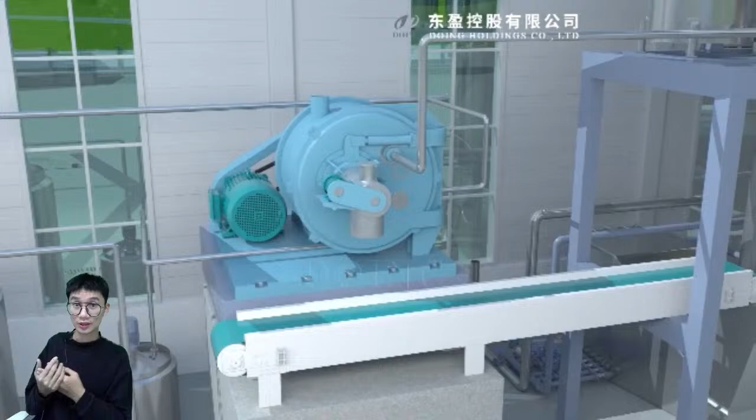Before I show you guys our processing technology, I'd like to spend some time to show you about our company, which is called Doing Holdings. We started to do the cassava starch business, gari business, cassava flour business, potato starch, and sweet potato starch business since 2011.

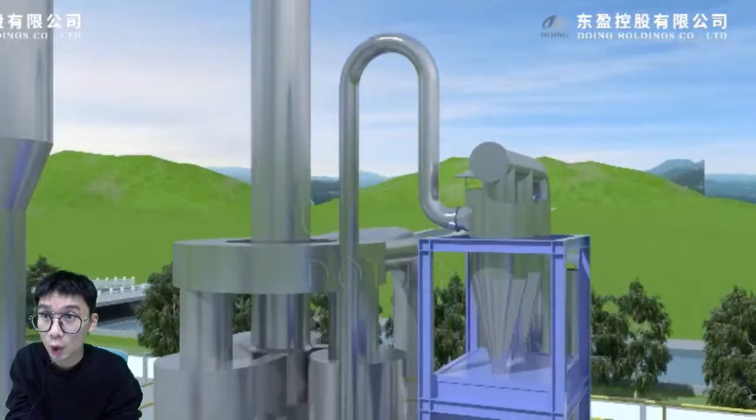For our starch processing line, the starch rate can achieve 94%, which you can easily compare our company's equipment with other companies or other countries' equipment. You will be totally amazed by the high efficiency and the price, because we have our own workshop, we have our own factories.

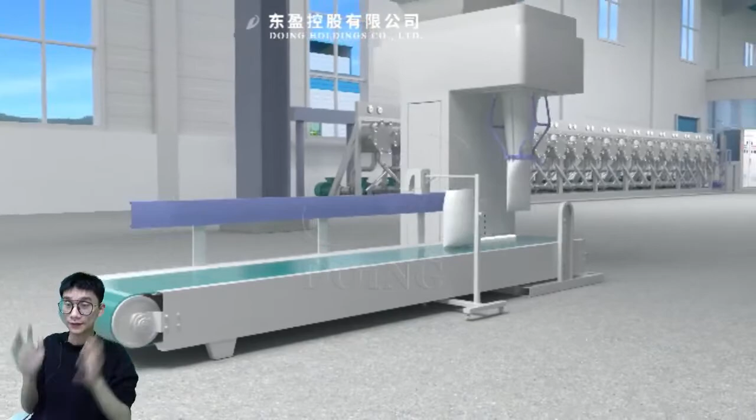Our company is called Doing Holdings, and for the factory, we have two factories in China, both based in Henan province, China. But since this year, we started to have our own factory and overseas office in Nigeria.

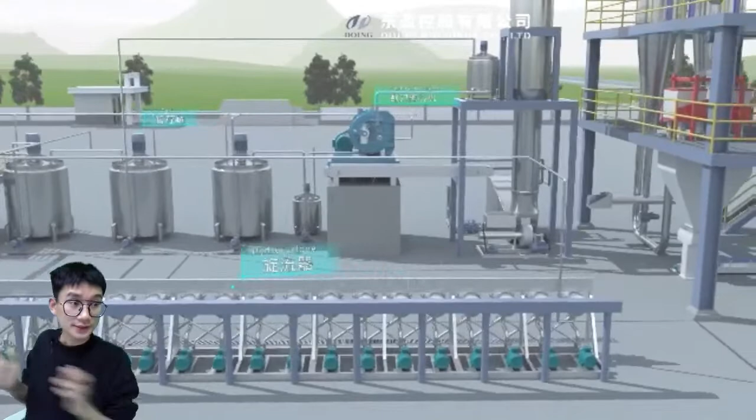All right, let's start from the beginning. I'll show you every single detail for the cassava starch processing line, and later I will also show you some real video that our previous clients sent us. So I'm sure you guys can definitely get more information and know more about the equipment.

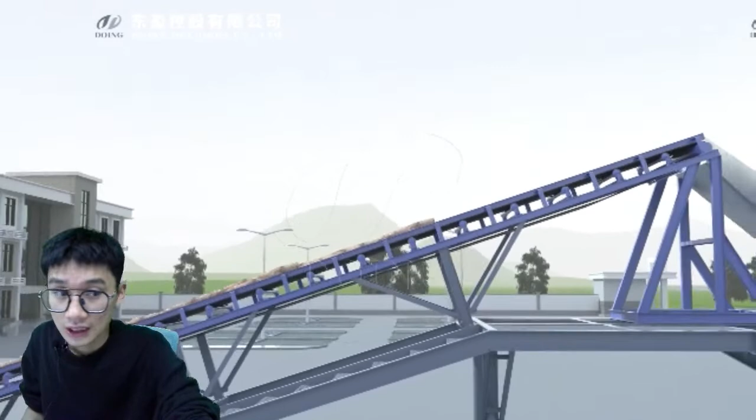And then this is our belt conveyor. The friction is large enough so that all of the raw material will not fall off the belt conveyor easily, and it will not break easily.

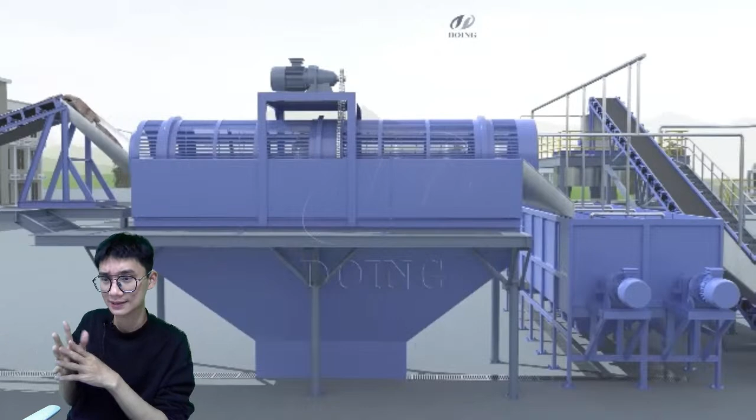The first device that we use here is actually the dry sieve. Let me just pause it here. For this dry sieve, this part is actually the impurities outlet. When this equipment is working, it will keep rotating, and inside the equipment there is actually a helix design, with some sticks attached to the helix design.

So when it is working, all of the raw materials will be pushed forward from the inlet part going to the outlet part. And during this process, those big impurities, like sticks, mud, and sand, will fall off the raw materials easily.

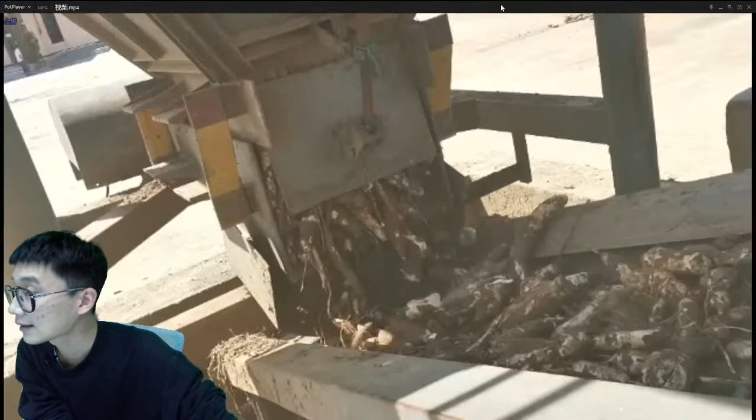Let me show you about the feeding hopper. This is our feeding hopper, can you guys see that? There are so many impurities mixing together.

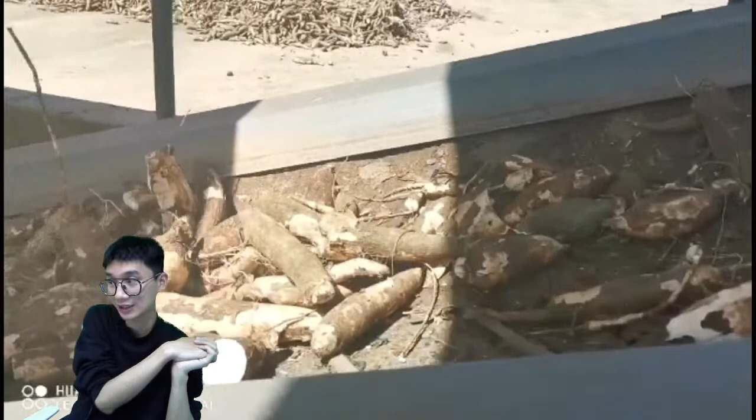Normally you can just directly get the raw materials from the farm, using a truck or other machines and vehicles for transportation, and directly put all of the raw material onto this gari or cassava starch, potato starch, cassava flour, or sweet potato starch processing line.

It is really convenient for both of us, and this is a vibration device. Especially if you do have a large scale, this one is the most necessary equipment.

Let's check about the other videos of the belt conveyor. Let's see about this belt conveyor, ladies and gentlemen. Check about it, really high efficiency, and it can easily control the speed and control the angle. It is just like the most necessary connection equipment.

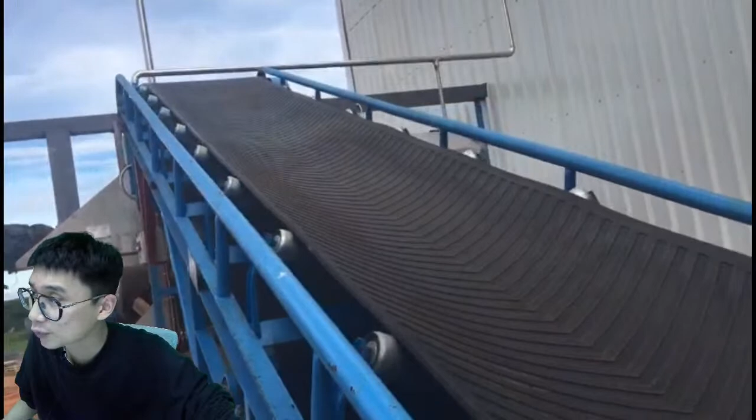Let me show you about the dry sieve. For the dry sieve, we do have several videos. Check about this one. For this dry sieve, they are using labor, doing all of the work by using laborers.

Check about it, this is our dry sieve. When it is working, it will keep rotating, not at a really high speed, but at a really stable speed, and it is really high efficiency. During this period, all of the raw materials rotate and the impurities are removed. For this one, they are using labor to do it.

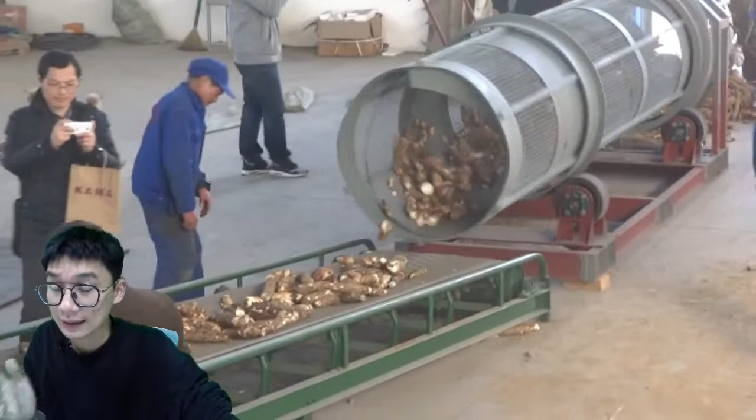But also, you can connect it with the feeding hopper, yes.

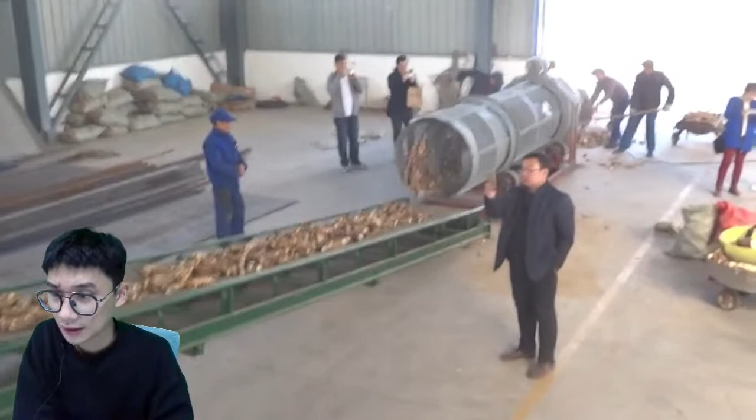Later I will show you guys what the impurities outlet looks like. Normally you can easily put a garbage bin or a plastic box or plastic bag at the bottom to collect the impurities. Otherwise, if you have a big scale, you can choose other plans.

Let me show you the impurities outlet. Check about this one, this is the impurities outlet. See, there are so many impurities, it is falling off out of the dry sieve.

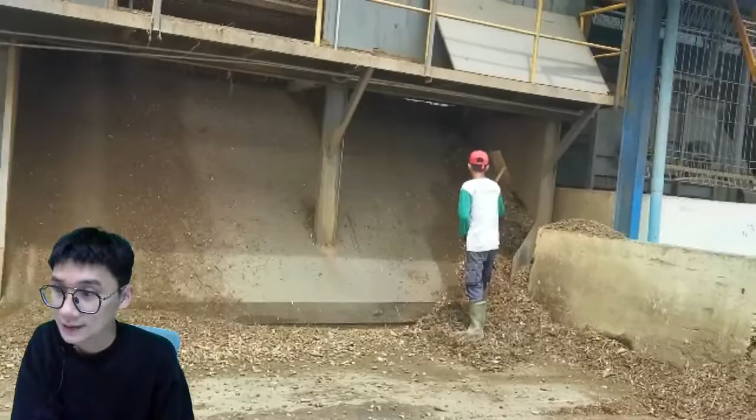Normally we will suggest you guys to set this equipment outside the whole workshop to make the whole workshop clean and tidy.

Or if you have cassavas or potatoes, once it is out of the farm, directly out of the farm, you can also add one of the water pipes to clean and wash at the same time. This one is most suitable for cassavas, because cassava has those long and thin materials.

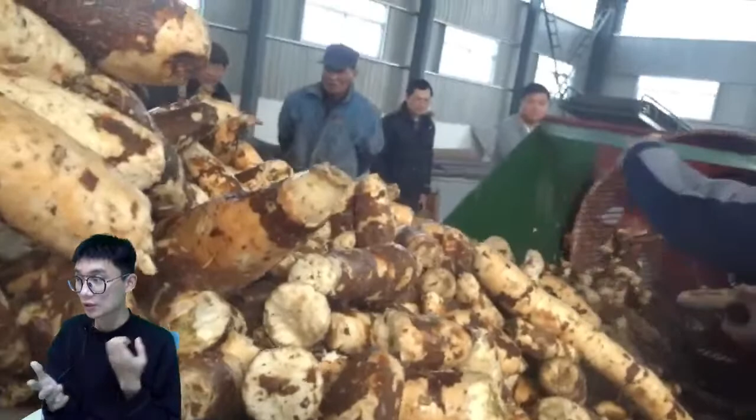But as for potato and sweet potato, we do have a totally different equipment to wash, and later I will show you guys that. For this one, we set a clean water pipe at the beginning part to wash it at the same time, especially if there's mud on the surface, it is really difficult to clean. So we set the water pipe at the beginning part to wash it, to make sure our potatoes, sweet potato and cassavas are clean and tidy. To make it easier, I will just use cassava as the example, but as for potato and sweet potato, it can all do the same.

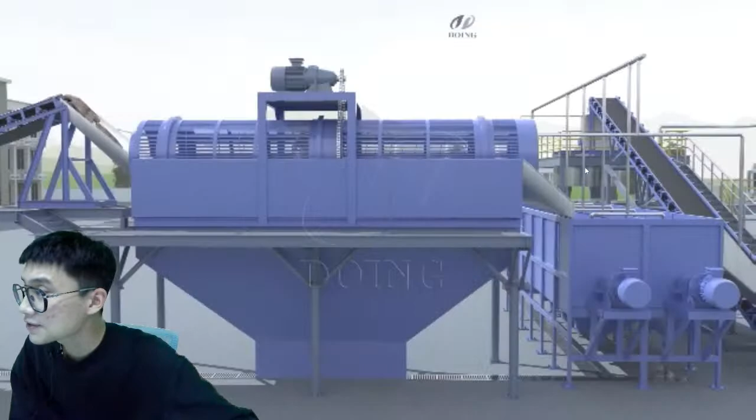Alright, this is our dry sieve, check about it. And after the dry sieve, let's continue to see more detailed information about this whole processing technology.

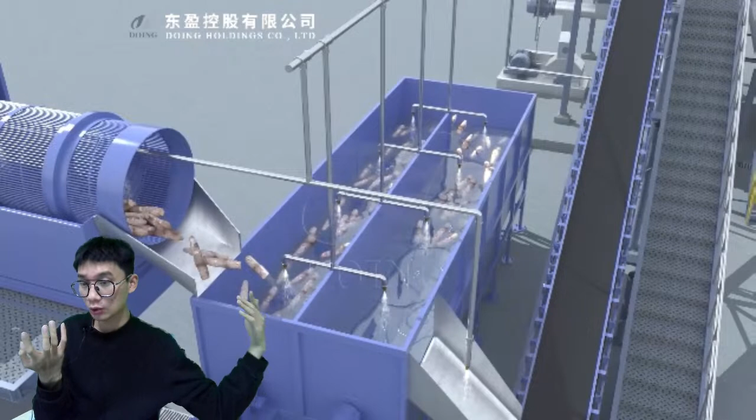Because at the bottom, there are two kinds of valves. Normally, we will turn the inlet part's valve on 1/3. So all of the water will directly flow from the high position to a low position, like from the outlet part to the inlet part. And our raw materials are still moving from the inlet part going to the outlet part. So by using this way, we are making this equipment adopt the counter current washing principle, which is really high efficiency.

And by the way, our engineers team can give you a customized design according to your needs, according to your basic information. If you purchase all of the raw materials from the farmer, from the market, sometimes you will get clean material, so basically the dry sieve and the paddle washer, you don't need it.

But if you have a large scale, or if you want to build a large workshop, this one is the most necessary one, because if you didn't clean the raw material from the beginning part, it is much more difficult at the later parts. If all of the material gets into the starch already, it is really hard for us to remove all of the impurities, even though we have the desander, even though we have like the--

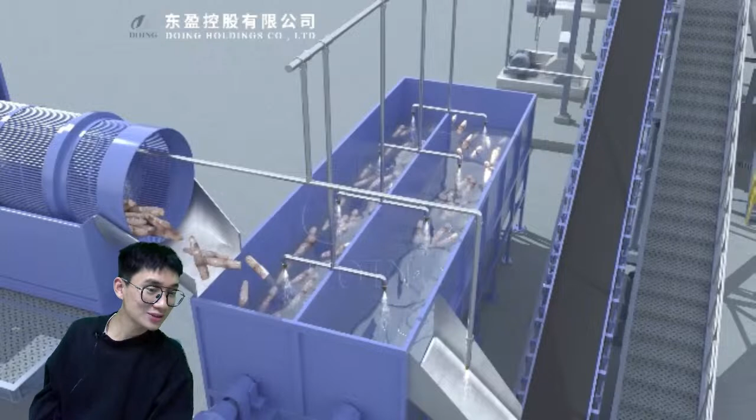Yes, I was talking about the impurities. Before you do the processing, when the material is still like potato shapes, or sweet potato shapes, or cassava shapes, you have to do your best to remove the impurities. Otherwise, when it gets into the starch, it is really hard for us to remove the impurities.

Even though we have the desander, we have the hydrocyclone station, we have a lot of machines that can do that, it is really difficult for us to make it, because if we have already obtained the starch and want to remove the impurities, the starch will be removed also, so the final starch rate will be lower.

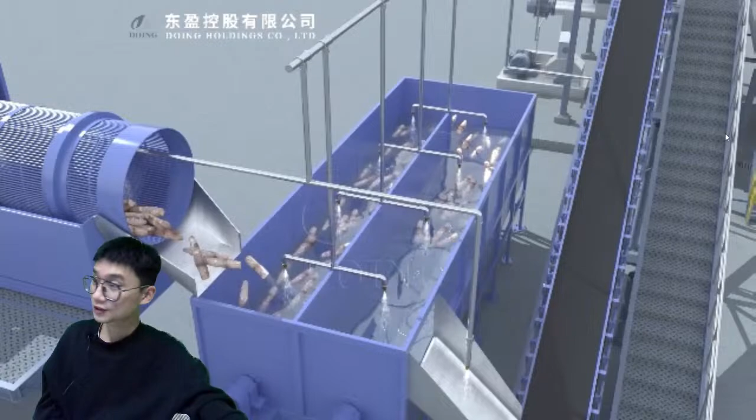Alright, let's keep checking the video here. And this one is our paddle washer, a really high efficiency one.

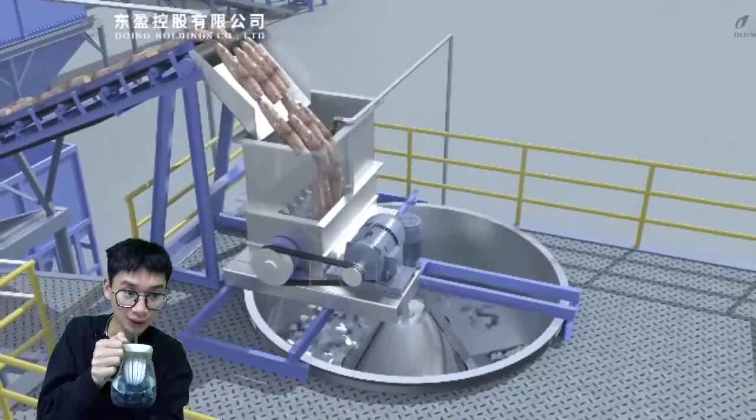This equipment that I'm pointing to right now is our cutting machine. Inside there are two kinds of knives adapted inside: on top, the rotating one, and at the bottom, a stable one. The rotating knives are made of 4CR13, a really durable material that you'll normally find in your kitchen. We have different types with 17 knives, 13 knives, or 9 knives.

You can choose the equipment according to your basic needs, because different capacity equipment has different prices. At the bottom there's a stable knife, so when the raw material gets cut and falls off, it gets cut again to make sure all the material is cut into small pieces, from 3 to 5 centimeters. This lets us do a much better job in the next part, rasping all the raw material into starch.

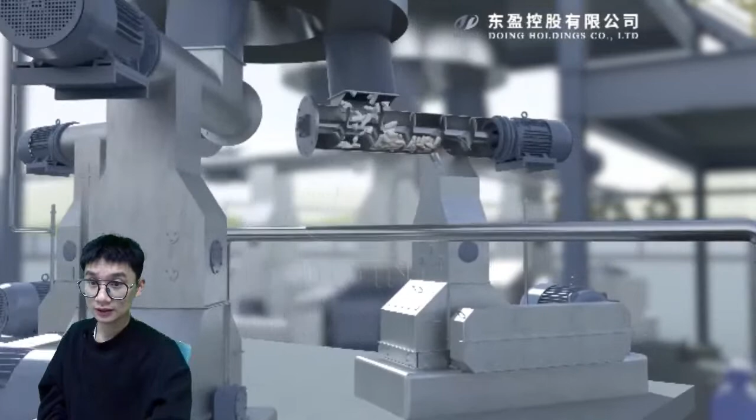Let me pause here to show you the magnetic separator. Over here, this part is our magnetic separator. It's not expensive at all, but honestly it's like a protection for the rasper. Once mixed with iron items, really hard things like iron nails, it will totally damage the rasper, which is the really key equipment in this whole processing line.

Let me show you the rasper. This is our rasper, ladies and gentlemen, check it out. This equipment you're currently watching has a drum inside.

When the capacity gets bigger, the drum gets bigger, the diameter gets bigger, so there are more blades on the surface, so we can deal with more raw material. For this equipment, the breaking rate is above 96%, which is really high efficiency.

On the surface you can see there are so many blades. The smallest capacity has more than 80 blades. If your capacity is bigger, there will be more than 200 blades on the surface.

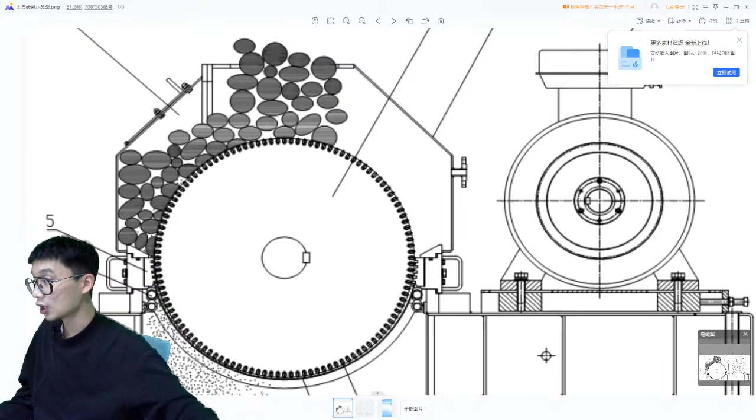This is the outlet over here, and this part is the screen. It's a really high efficiency one. If the raw material didn't get totally rasped, it cannot go through the mesh. It will keep staying on the surface until it is fully rasped.

And this is our rasper. You can easily compare our equipment with other companies or other countries' equipment. I believe it is the most high efficiency equipment so far.

All of the equipment is produced by ourselves, so basically there's no middleman. If you want to purchase the equipment, we are your best choice, especially our engineers team.

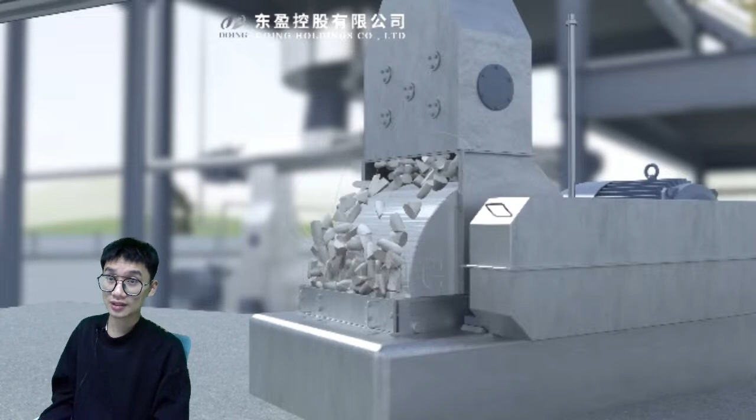All of the engineers in our team graduated from the only university that has a starch major. So they are very professional, and they have done the starch business for more than 20 years. Even though our company has 13 years of experience, they have done the starch business a long time ago. They are very professional.

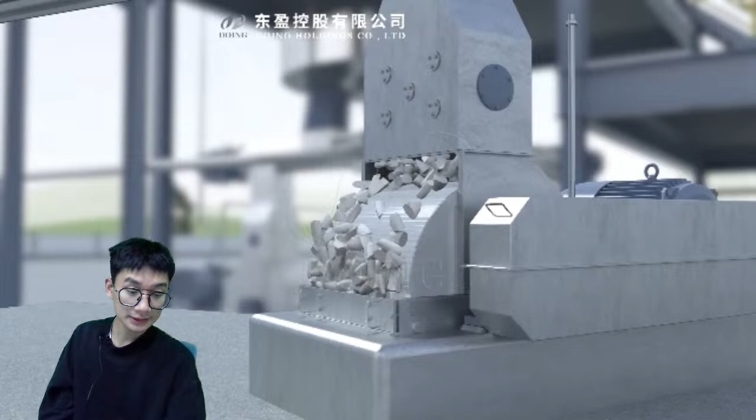All right, let's continue to show you more about this processing technology.

Yeah, this is our rasper. After we get the starch, we temporarily store it underground, and then we use a pump to move all of the starch to the next equipment to remove the fibers, because there are a lot of fibers like impurities.

You guys can see here the outside that I'm pointing at right now - it is the inlet for this... centrifuge sieve. Yes, this one is our centrifuge sieve, and this part is the inlet for the centrifuge sieve.

When the mixture of starch and fibers gets into the equipment, let me show you its inside. All of the starch will spray onto the screen over here, and it will rotate 1,200 times per minute.

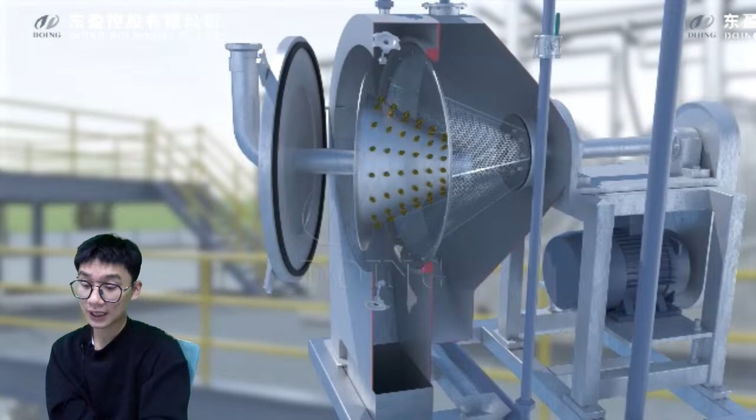Inside of it, there is a really tiny screen. The big fibers cannot go through the screen, so they exit the equipment at the left part, and our starch will... can you see? This is the separation. The outside part I'm pointing at right now is actually the fibers, and the inner part is the outlet for the starch.

When we sieve out the fibers, we didn't throw them away immediately. We have one more step. Let me show you - because when the fibers come out, sometimes they also take away some of the starch. To avoid this loss, we make a bundle.

Normally we will use 4 or 5 of this centrifuge sieve to lower the starch residue rate. We can easily control it. When the fiber comes out of the first one, we will directly put the fibers into the second one, sieve it again and again.

Check about it - this is our centrifuge sieve. In the market, there are many other types, like the vertical one or the round one. We have all of them in stock, but nowadays, in 2023, we normally recommend this one. It is the best equipment, and we get this equipment from Europe, with really high efficiency.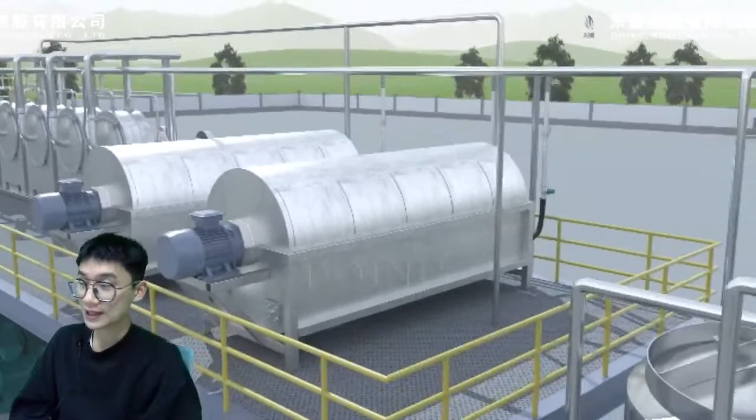Currently, we are showing you about this centrifuge sieve, which I have already shown you, like how it works and how you choose the equipment. If you didn't know how to choose the equipment, you can also put it in the comment. I can also teach you guys how to identify the equipment, because there are so many different types, and different types of equipment are suitable for different situations.

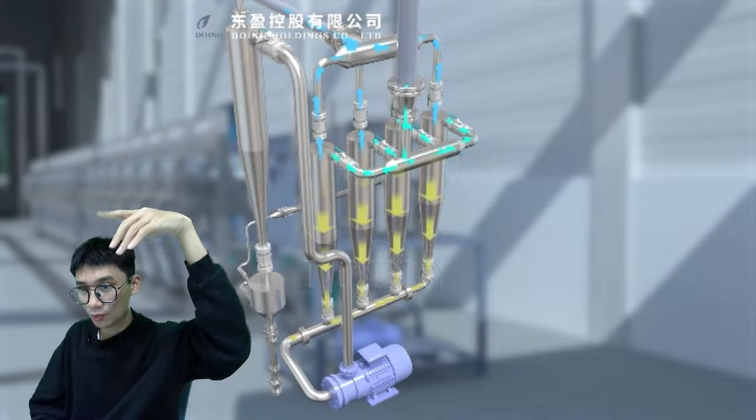This one is our desander, which removes the impurities at this part. You can remove the fine sand again, because the gravity for the fine sand and for the starch is not the same. The fine sand is much heavier than the starch, so the gravity is getting bigger. So all of the starch will go out of the equipment at the upper part, and all of the fine sand will automatically drop at the bottom to separate the fine sand out of the starch.

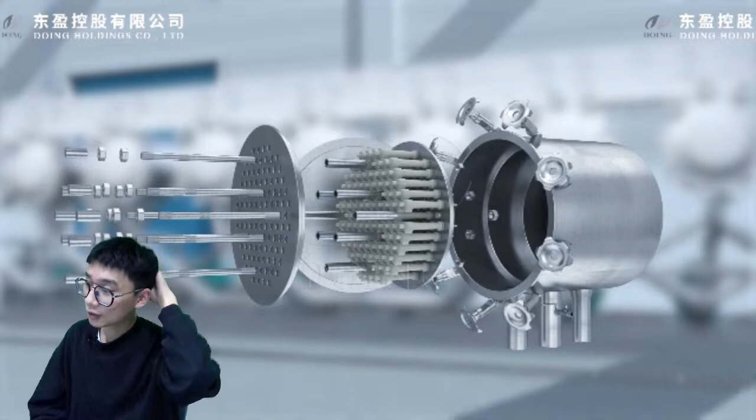In the middle part, there are so many tubes adopted, and all of the starch will get into these tubes directly. Due to the gravity, it will rotate inside the tubes, and all of the heavy items like the starch will go out of the equipment when doing the swirling, exiting through the bottom outlet. The lighter items like the cells will go out through the top part during the swirling. This way, we can separate the cells out of the starch, just like this.

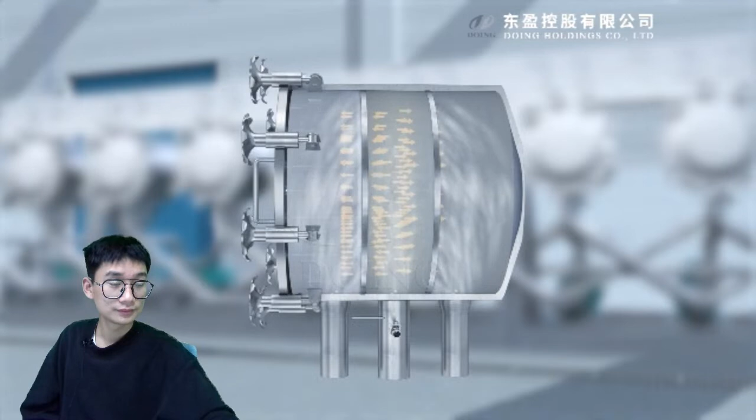Let me just pause it here. And for this hydrocyclone station, there are so many things I'd like to stress.

Just to explain a little more, we all know that starch has national standards, including whiteness, moisture, ash, protein, and other indicators. If you do not have a high requirement for starch index or just want to achieve a simple concentration standard to reach dehydration, then a 6 to 8 level cyclone is also feasible, which is why for the same automatic production line, the price is not the same.

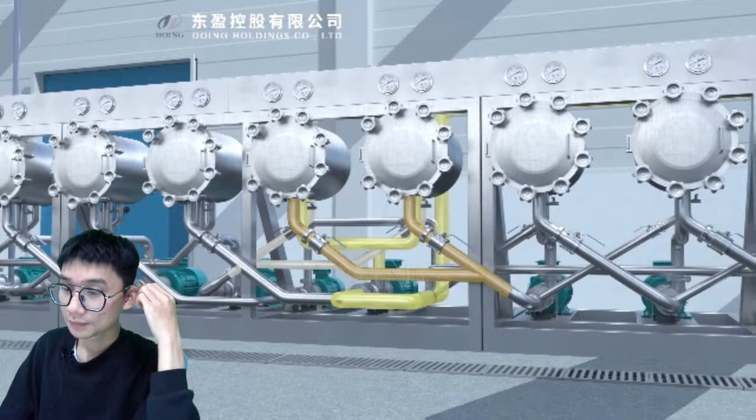According to the configuration of our process, we have no problem achieving the superior quality standard. Moreover, the 18-stage cyclone includes a recovery part, which also ensures the starch yield of the whole line. We still have to make a plan according to your quality requirements for finished starch, so as to give an accurate equipment price.

In our cyclone machine, the pipeline connection between the cyclones is made of 304 stainless steel food-grade material to ensure the quality of finished starch. It has a long service life. If plastic pipe connections are used, it will reduce some cost, but the service life will be greatly shortened.

Considering that starch production is generally 24 hours of continuity, if a mirrored stainless steel design is used, night production will reflect light, which is not conducive to workers in the workshop for operation, and it will cause light pollution. We use matte stainless steel, so there will not be such a problem.

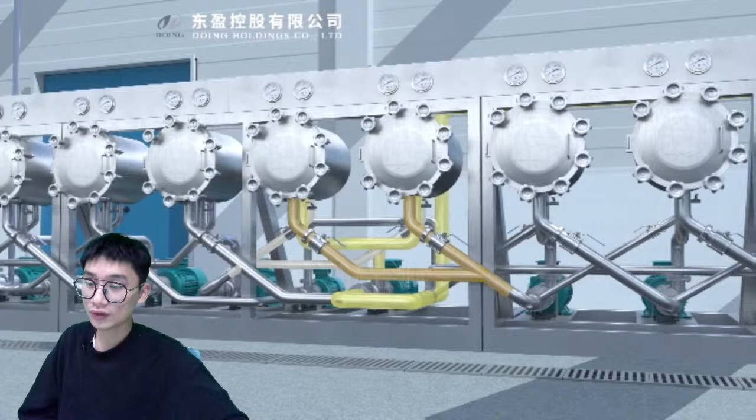The swirl tube is made of nylon 66 food grade material, which is of high strength and durability. Domestic potato and millet starch will not break it down even after 3 years of operation. Our project in Indonesia has been in operation for 3 years already, and it has not been replaced yet. Check out our hydrocyclone station.

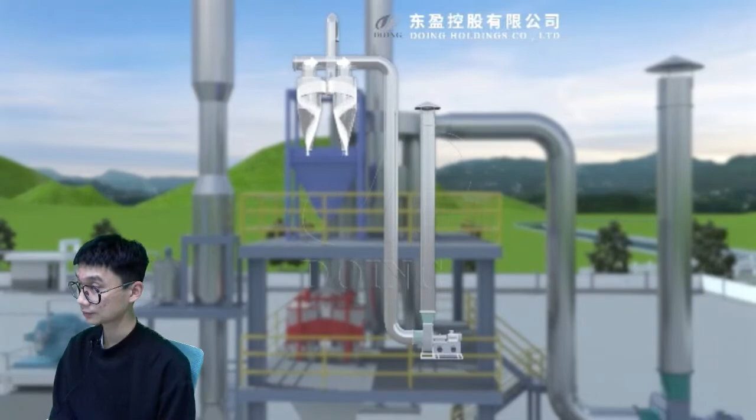And then this is our cooling system. Check about it.

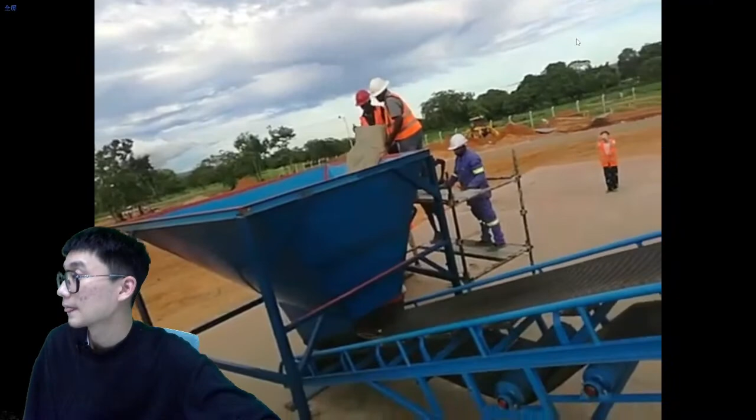Let's go check about this one - that is one of our previous clients' videos sent for us. Yeah, this is the feeding hopper. This is the feeding hopper. Can you guys see? And also this is...

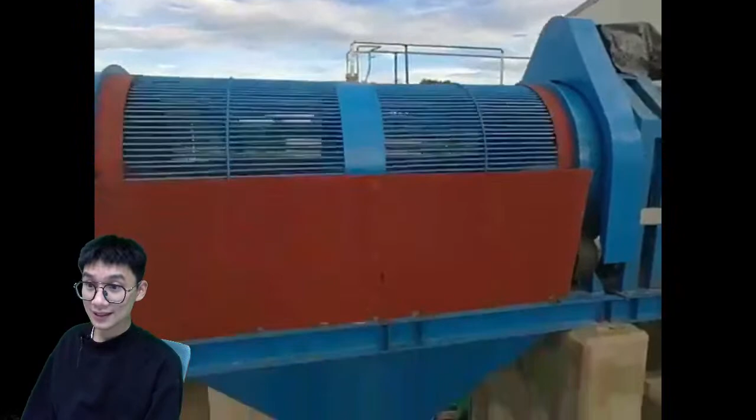Our project in Nigeria. For this belt conveyor, you can easily control the speed. This one is much slower, but if you want to speed it up, or if you have a large scale, you can adjust the speed. And then it is our dry sieve. Can you see? It is our dry sieve, removing the impurities. It is one of the equipment at the bottom.

And then it is our paddle washer. For this one, it is not for cassava starch, instead it is a Gari processing line. But also the washing part is actually the same because the material is cassava tubers. So you guys can see this is our paddle washer. As for the paddle washer, you can adjust the speed also. If you think it rotates too slow, or if you have a large scale, or if you just want to speed it up, you can adjust the speed according to your needs, according to your wants. This is for the washing part.

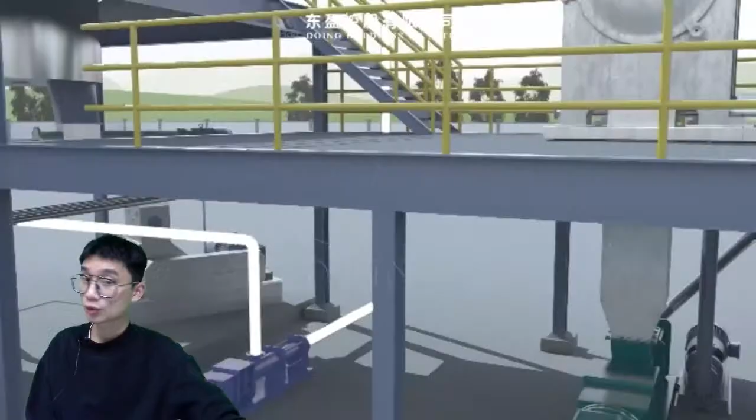And this is how we do the shipping. But if you are living in Nigeria, we do have a factory in Nigeria, so do not worry about shipping - it is much more convenient for both of us.

Let me show you how we do the packing. This is the shipping, and let's check the packing. Yeah, this is just a sped-up video. Hold a second, I believe I can find one of the normal speed equipment videos. Let me find it.

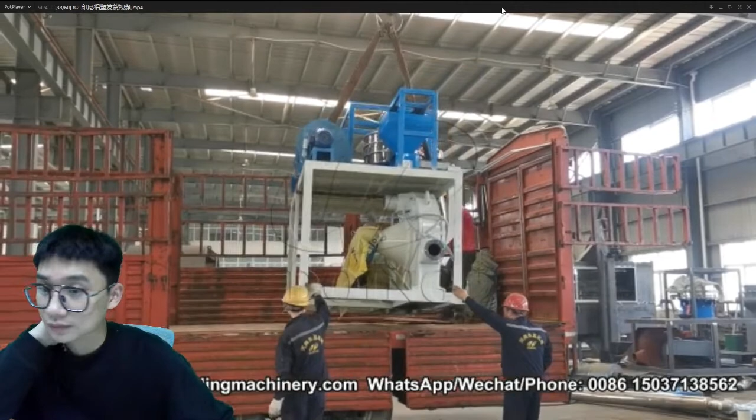Ladies and gentlemen, check this, this is how we do the shipping. I believe there are some other videos about the shipping.

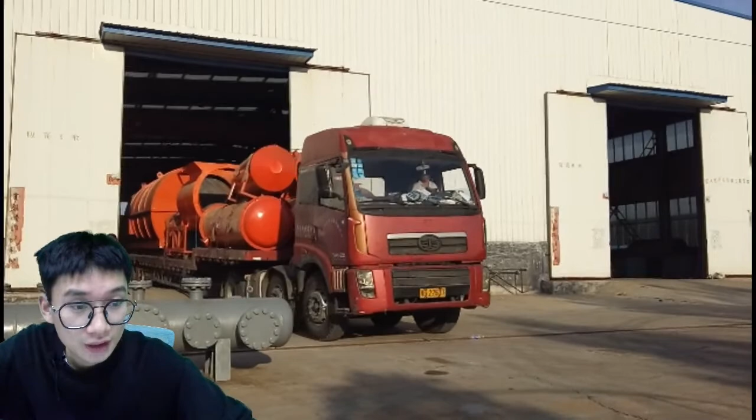Yeah, this one is from our old factories. Shipping all of the equipment from China to your place, to your countries.

So if you need anything, you can just let me know. And this is how we do the shipping.

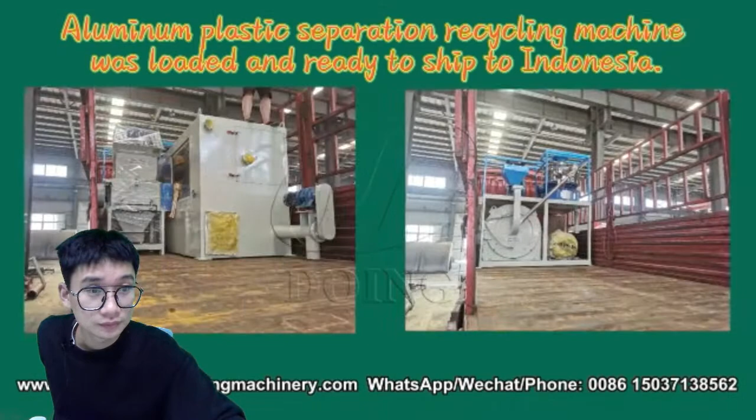Oh my god, there are so many. Is it the same one? Yeah, I think this is the same one.

All of the machines are totally protected by plastic bags, by the protections. So do not worry, when you receive the equipment, when you receive the machines, they will not be damaged.

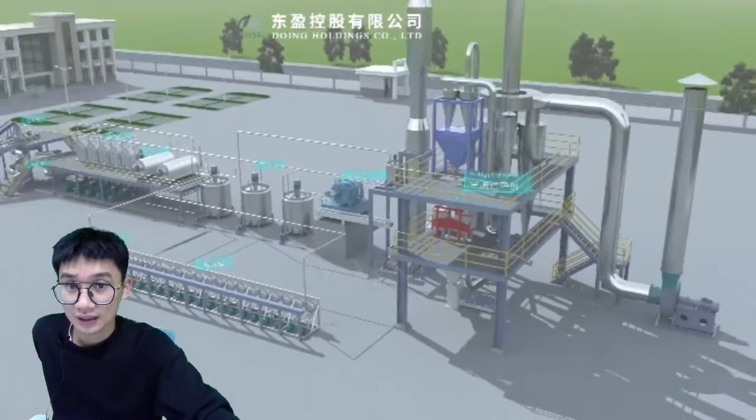And this is our cassava starch processing line. If you guys have any questions, or if there's anything you'd like to know, let me know. Since this year we started to have our overseas office and overseas factory in Nigeria, if you are living in nearby countries, just say something, let me know.

We can show you the accurate address. So if you want, you can have a visit, make an appointment with our sales manager and our overseas engineers. They are waiting for you.

That is basically all for the cassava starch processing line. We not only provide you the cassava starch, but also the Gari processing technology, the Gari machines, and also the cassava flour machines, potato starch, sweet potato starch - we can provide all of that.

We started doing the starch, Gari, flour business since 2011. So far we've got more than 13 years experience to show you detailed information and provide you the equipment.

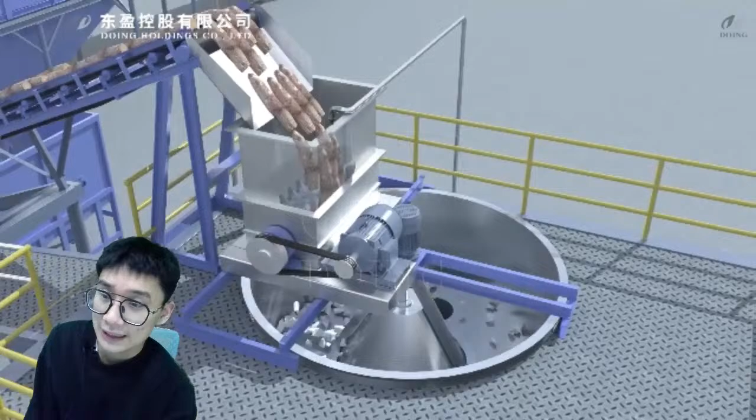And there are so many companies that purchased equipment from us because we have our own factory. All of the equipment is produced by ourselves.

So yeah, this is it. Let me show you the packaging machine.

All right, and this is - let me just make it bigger. This is what we do for the packing, and this is our new factories in China.

We have two factories in China. The total amount is about 40,000 square meters with more than 200 workers producing the equipment for us, for our clients. Can you guys see that?

And this one is also equipment about the cassava starch. If you guys need anything related to the Gari business or related to...

Why am I stuck here? What? Hold on a second, let me... yeah.

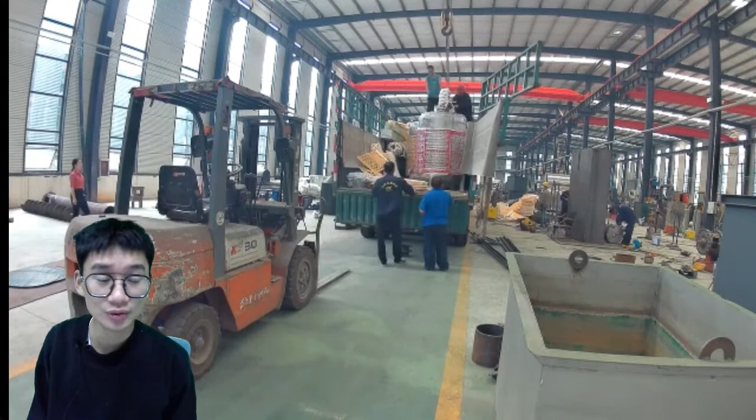If you have any questions, just let me know. This is how we do the packing and shipping. This is the factory in China.

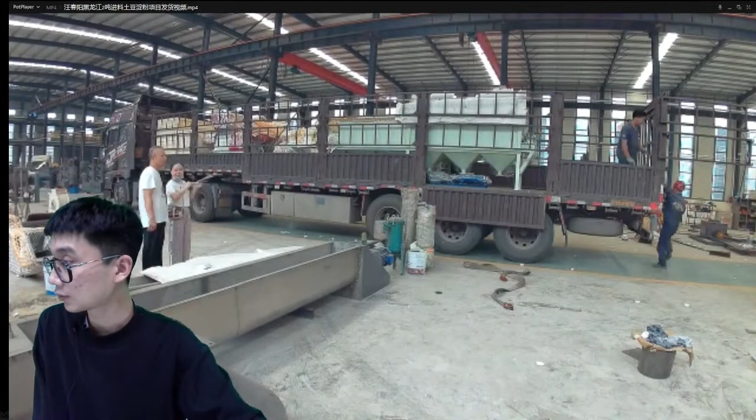All right, let's check how long we have. Oh, there's just 1 minute left. Maybe we can just wait till it ends.

If you need anything related to the starch business, Gari business, or cassava flour business, let me know. We can provide you all of the equipment here — it is produced by ourselves. This is the factory. There are many companies that purchase equipment from our company and then resell it, so the price gets higher because they want to earn money. So if you purchase the equipment from us directly, the deal is really good.

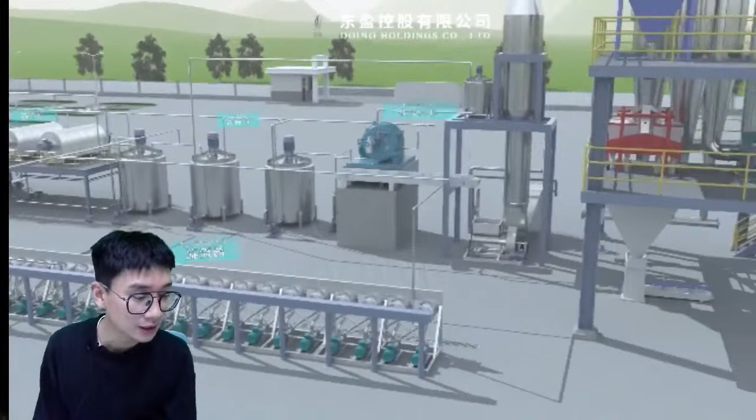This one is our cassava starch processing line. For the next live stream, I will do it 2 days later, not tomorrow. I will show you the Gari processing line. So if you're interested in the Gari business, you can come back here 2 days later.

Let me just speed it up. How do I speed it up? No, over here, I believe. Oh, anyway.

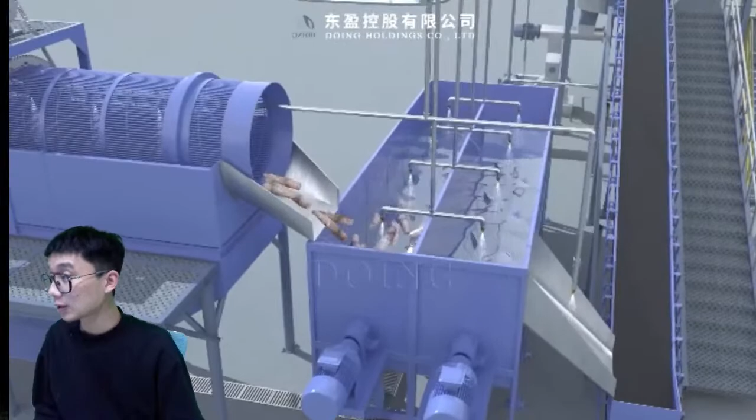This one is our paddle washer, used to wash out all of the mud, sand, and impurities. Over here is the clean water pipe — it washes again because the water inside is reusable water.

And then this is our processing part. For this whole cassava starch processing line, the starch extraction rate can reach more than 94%. This is all because the breaking equipment we use is really high efficiency.

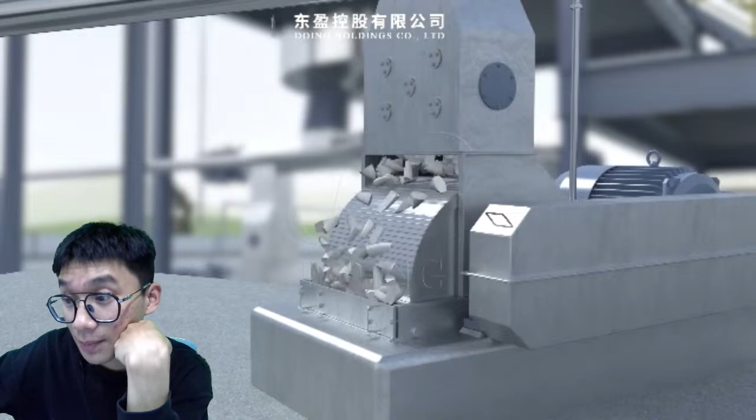Let me show you — this one is our rasper. The breaking rate can reach about 96%, which is really high efficiency.

If you are using this rasper for cassava starch with 4 tons of raw material, you can get 1 ton of starch. But if you use other equipment like a hammer mill or other breaking equipment, the breaking rate can reach 80%. That's already good equipment, but it cannot compare with ours.

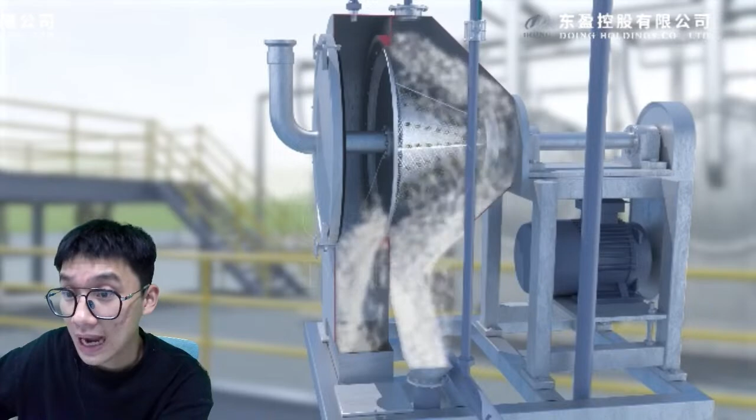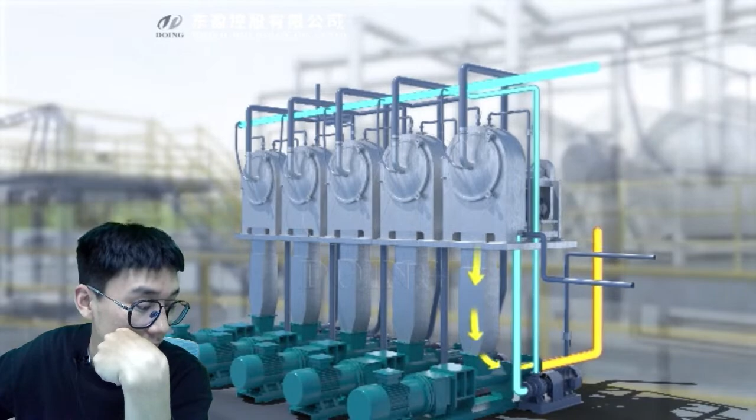All of the equipment's material is made of stainless steel plate and food grade material. Don't worry about the material damaging a human's body with long use — that will never happen. Our equipment comes with a 1 year warranty, so don't worry that after placing an order, if the equipment has a problem after 6 or 8 months, you cannot find us. No need to worry, because our company has been in the starch business since 2011.

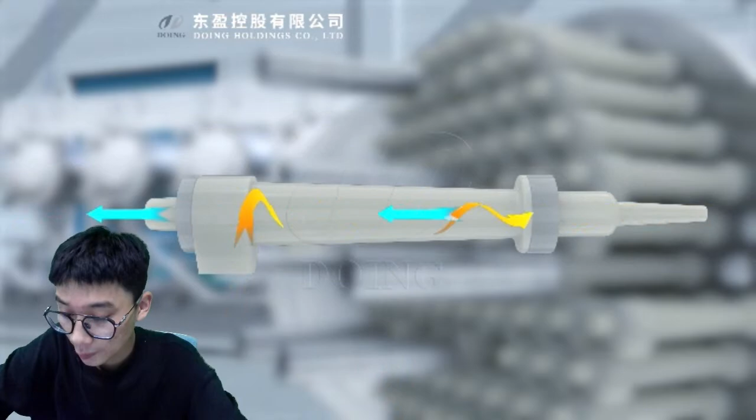In 2 days, I will show you guys the garri processing technology. If you are living in Nigeria, you will know what garri is, so I don't need to say a lot about it now.

So let's see, do we have more questions? This is our hydrocyclone station, and the equipment before this one is called the centrifuge sieve, yeah, the centrifuge sieve.

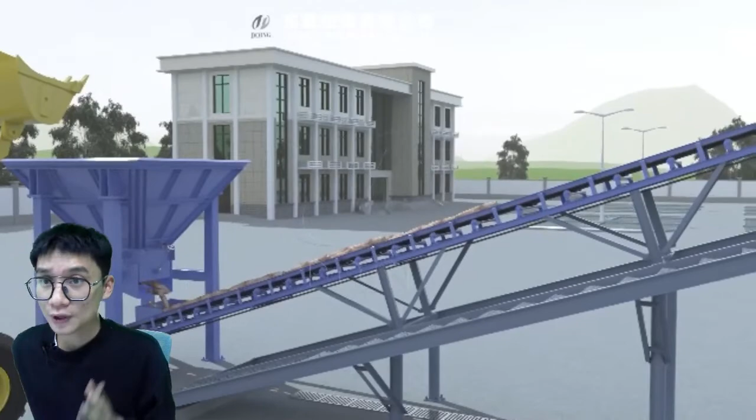Or if you just can't wait, you can also ask our assistant for videos to watch as a reference. You can easily compare our equipment with other companies' equipment, and you will know that no matter the quality, the material, the capacity, or the price, we are the best. For price and capacity, we have different types, from 1 ton per day to 2 tons, 5 tons, 10 tons, 20 tons, 50 tons, 100 tons per day equipment, all in stock, and the price is not the same.